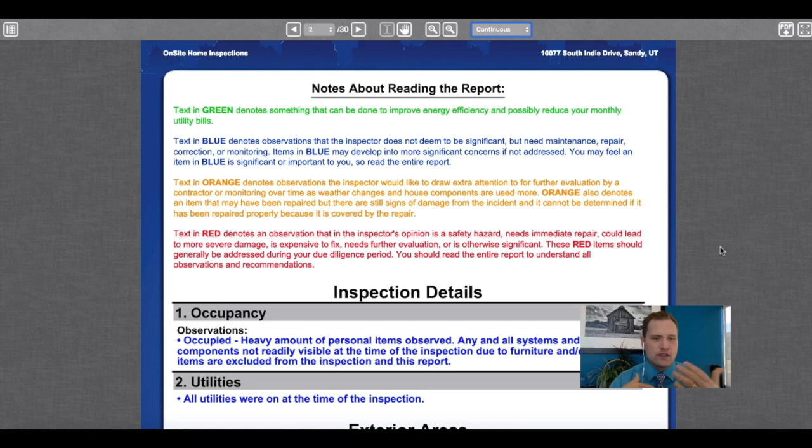Every report will have some sort of a cover page, and every inspection report will have their own method for reading a report. There's usually some sort of a key at the beginning. In this one, it uses color: green is something that can be done to improve energy efficiency, blue denotes something the inspector notes that's not as significant, orange is a little more serious, and red is something they think is a safety hazard requiring more immediate attention.

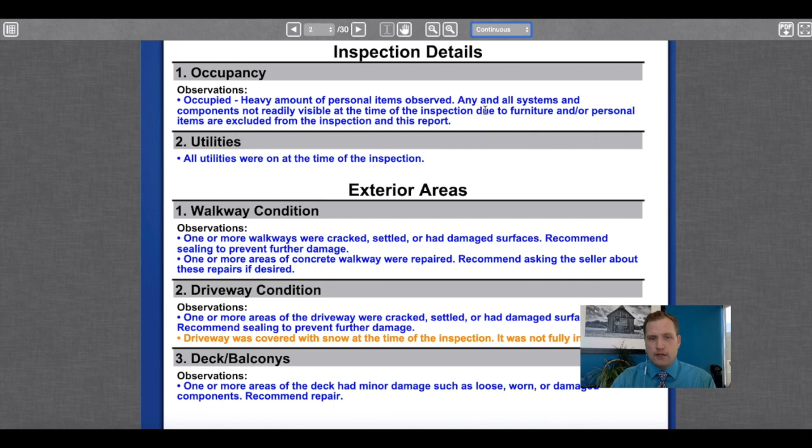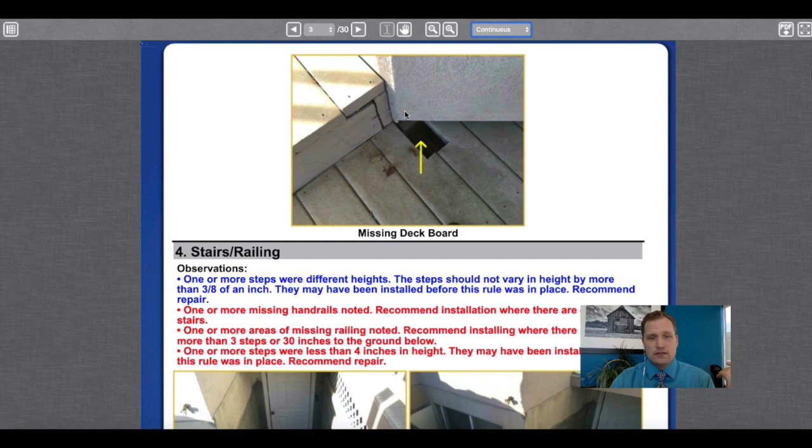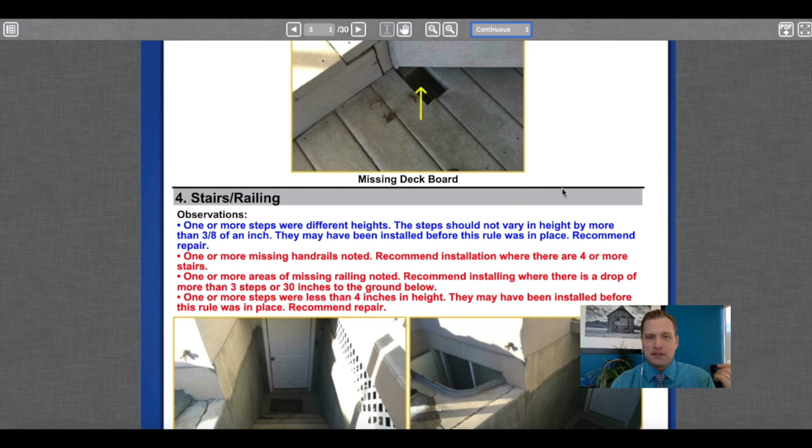You can see it's an occupied home, the utilities were on, and they observed the walkways, driveway condition, decks, and balconies. Here it's notated there's a missing deck board. They may have had something for their own personal use there that made sense for them, but may not make as much sense or be a good thing for the new buyer.

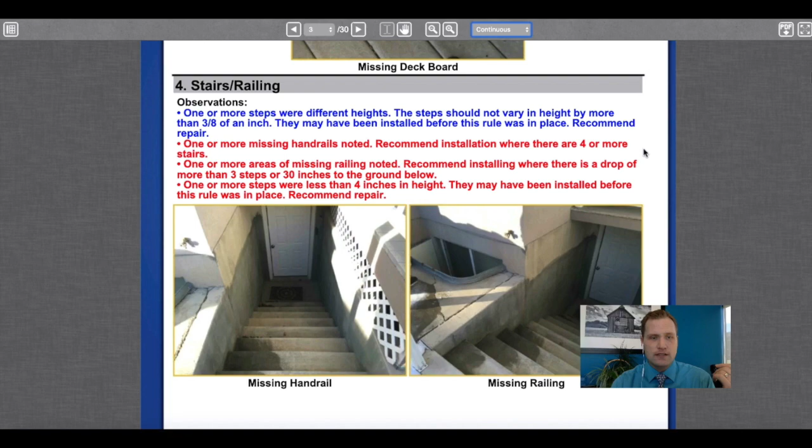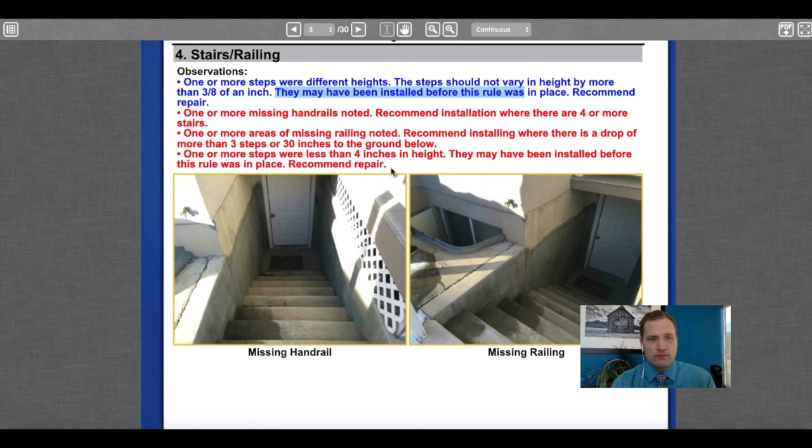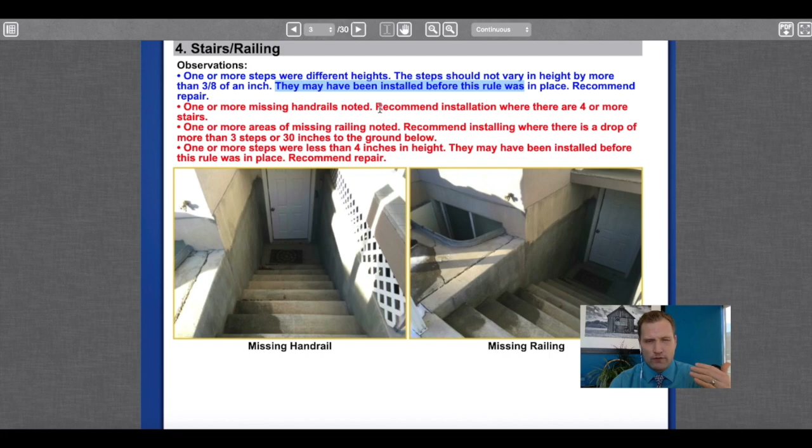Stairs and railings: there's a blue notation here that the steps are a little bit different height. They flag things, saying it may have been installed before this rule was in place. But look, stairs and railing has some red items too, like missing handrails. Though many people don't need handrails to get up and down the stairs, it's more of a safety hazard, and sometimes some loans may require that, which is why it's in red.

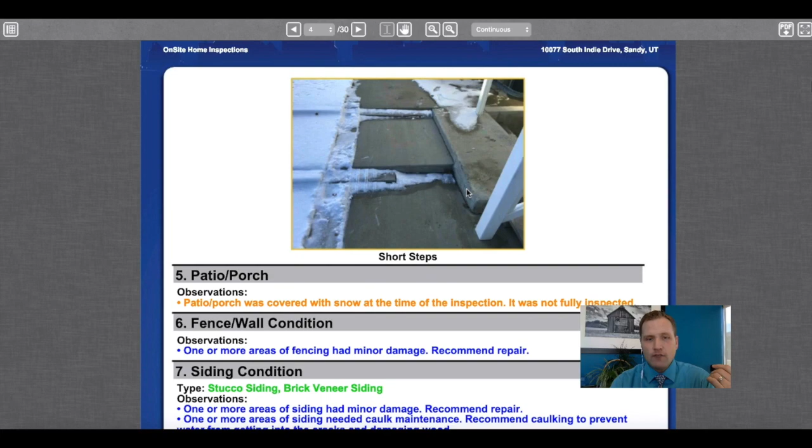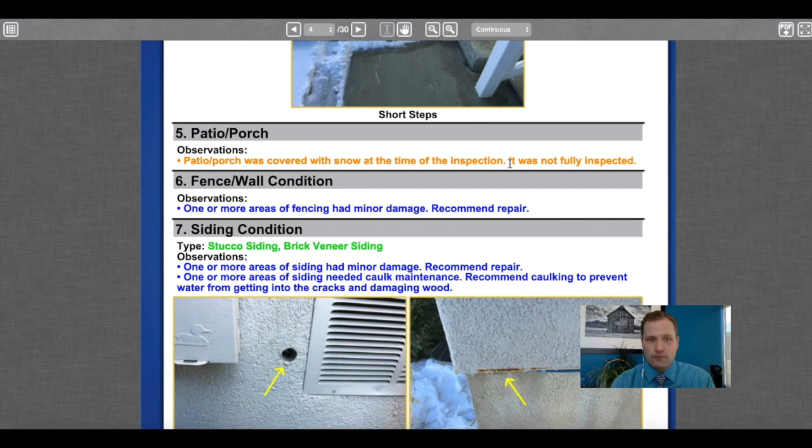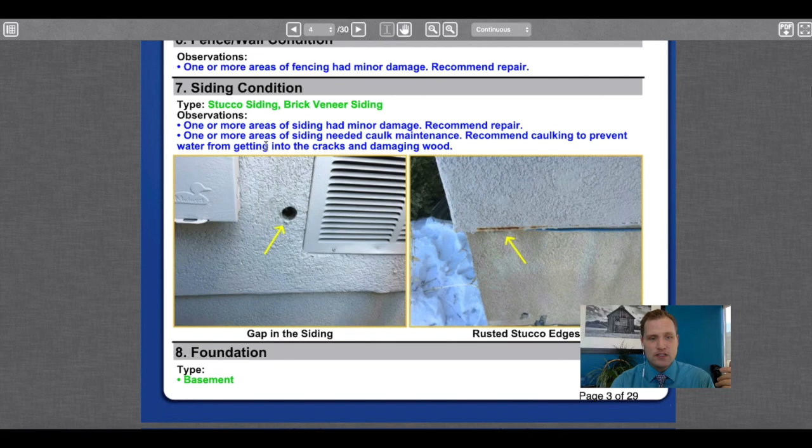Let's keep moving forward. We have short steps here, which isn't such a big deal but could be a potential trip hazard. The patio porch was covered with snow at the time of the inspection, so anything they can't inspect, they usually say why. We have some fence or wall condition issues, siding condition, so you can look and see each item that they feel is necessary.

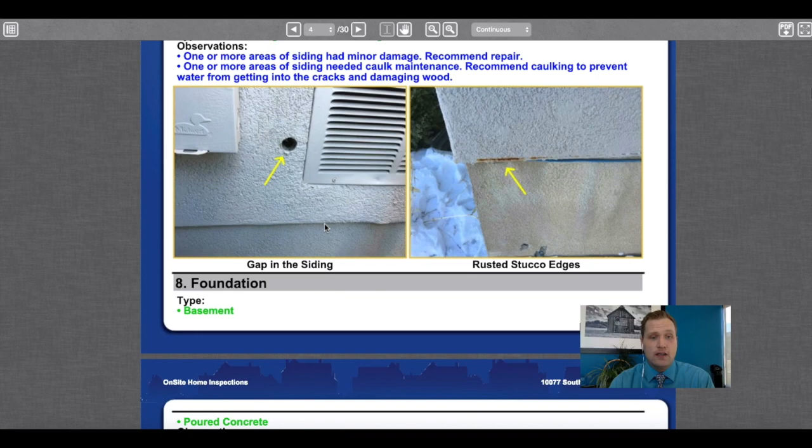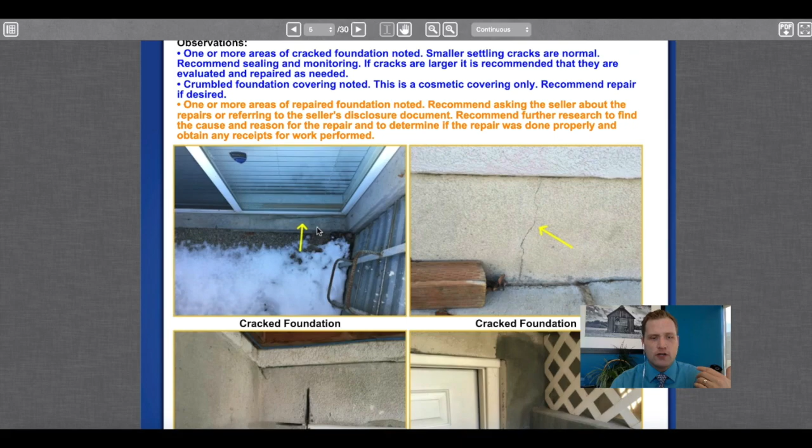They will add a picture so you can see what that means or what they're talking about. So you can see an example: here we have some pictures of the foundation, with some small cracks. The notated yellow arrows help you see exactly what they're talking about.

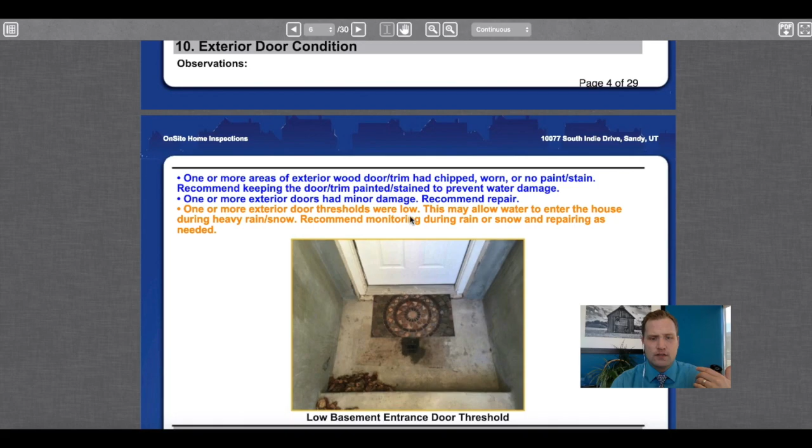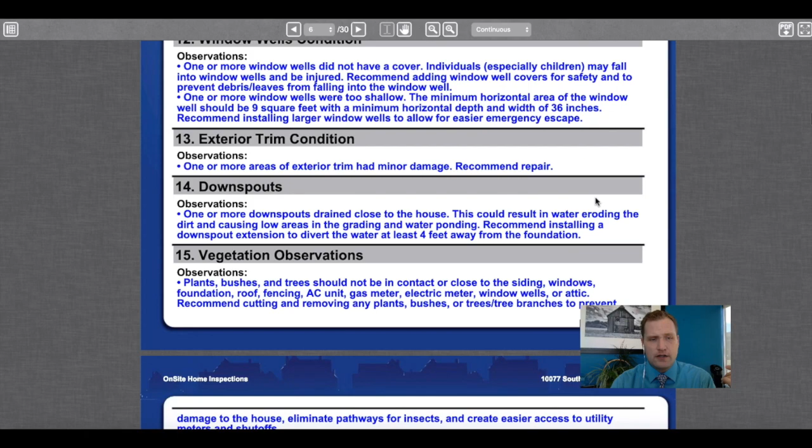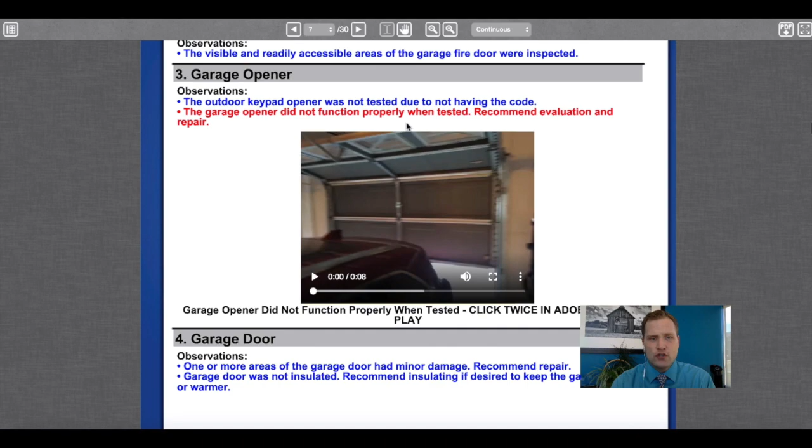Windows, window wells, exterior trim, downspouts, vegetation, and then we get into the garage. We have the firewall and the ceiling, fire door, garage opener, garage door, and they're notating damage on the garage door.

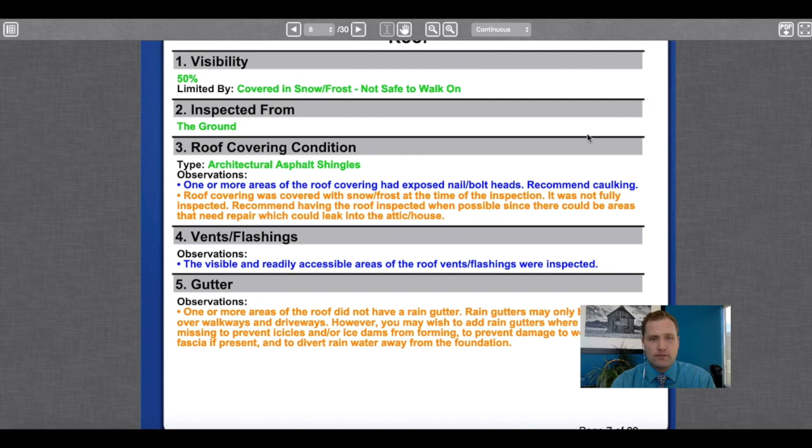No rain gutter notated here, right? They do take a look up in the attic.

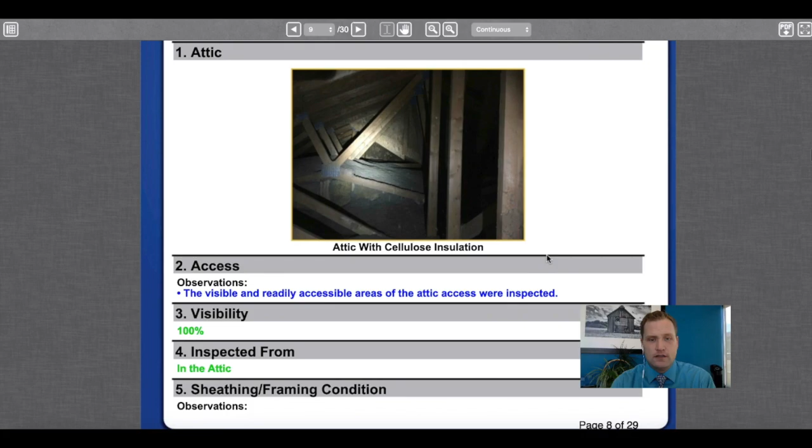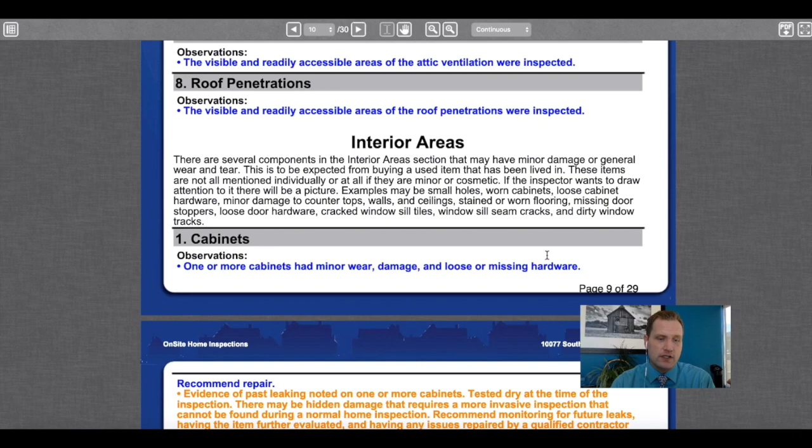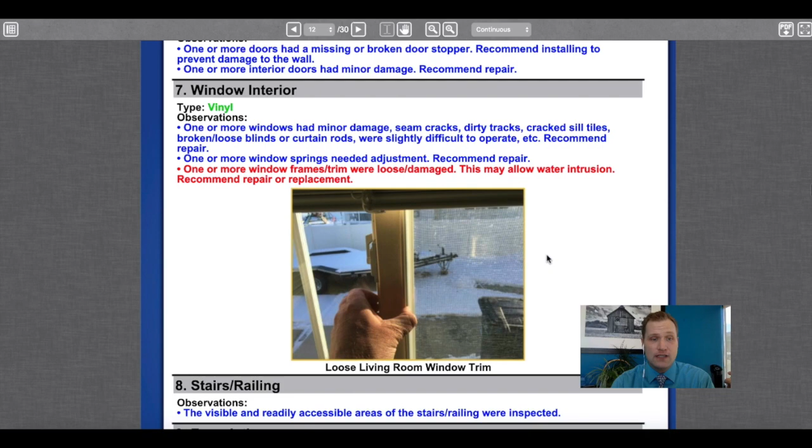Insulation condition, ventilation, roof penetrations, cabinets, countertops, wall condition, ceiling conditions, floor condition, doors, window interior. We have stairs, railing, foundation, structure, insulation, appliances.

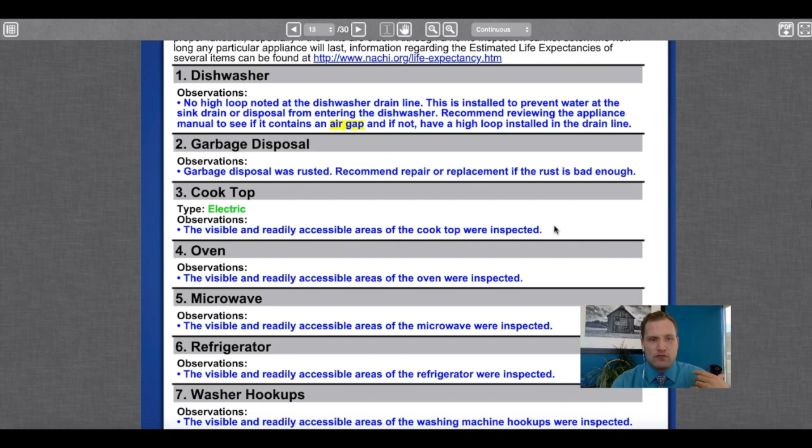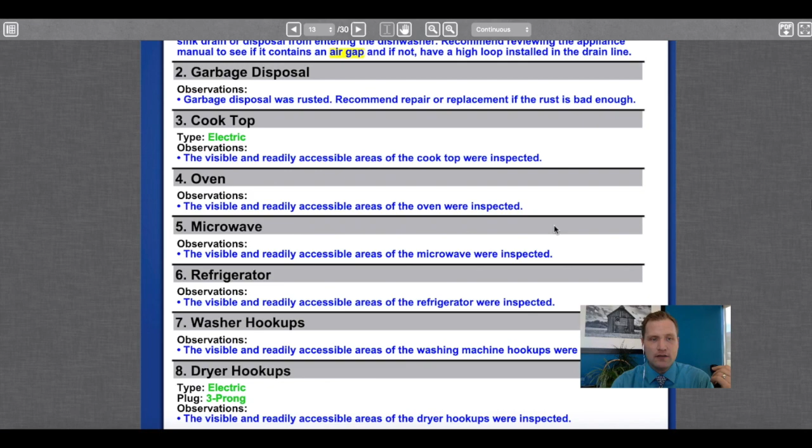There are sometimes where appliances do pass an inspection. They work as intended, and then sometimes people move in and they're not working so great. So that does happen once in a while, but at least you have someone there to check them, making sure for you.

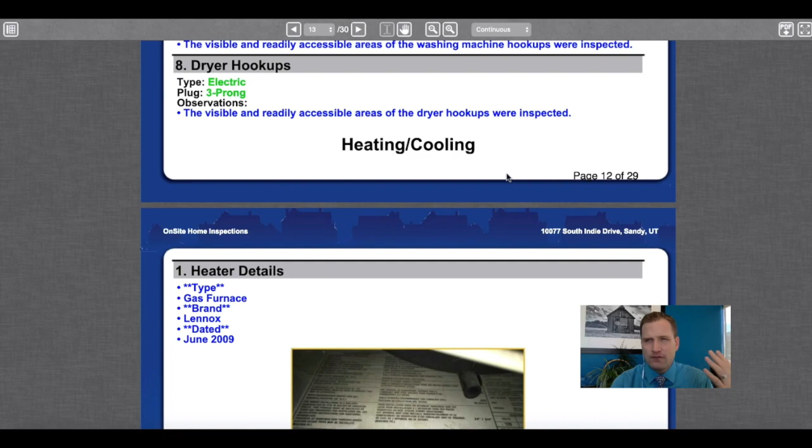Dryer hookups, it tells you what kind, right? So if you were not remembering if the home had electrical or gas hookups, you can go and look up in there.

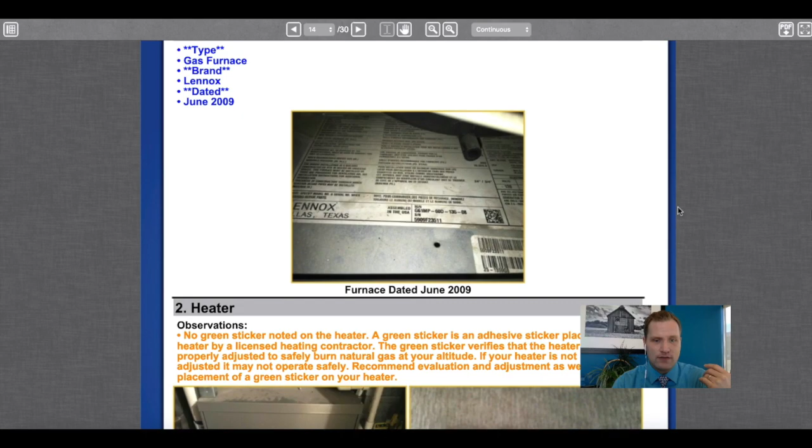Heater details, it'll give you the brand and what the date was if they can find it. This is a very popular one on the heater: no green sticker noted on the heater. Really.

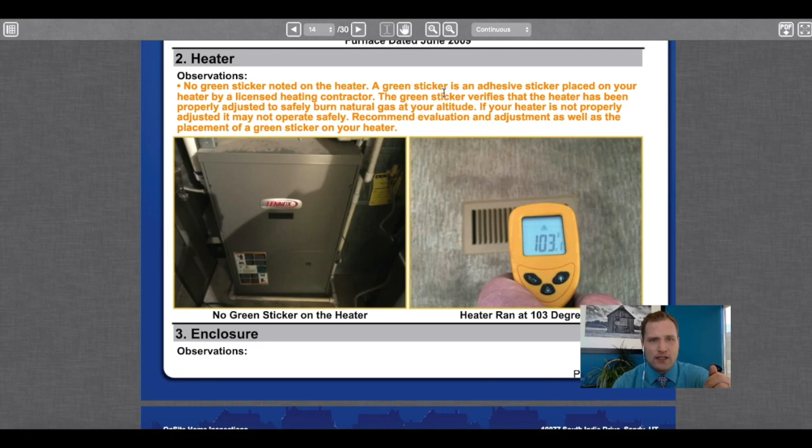If you are getting a home warranty on the home when you move in, then that would cover a tune-up as soon as you move in. If you want a green sticker, that's a little bit different. If there's a company that is still doing green stickering, then you could have them come out, and that's going to cost a little bit more.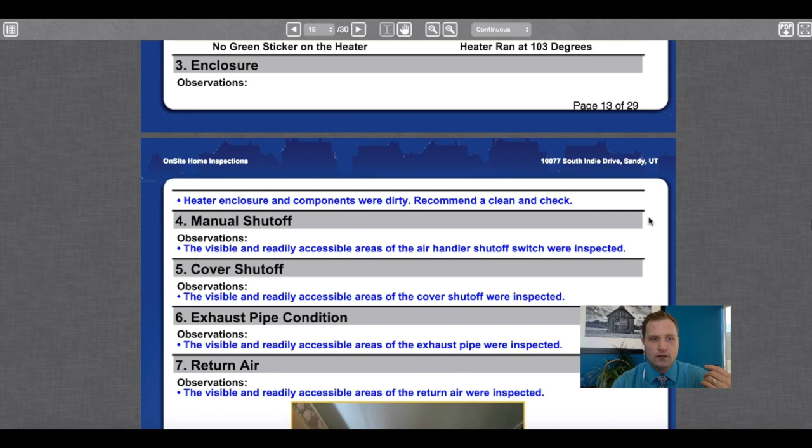All right. They test the temperature of the air going into the return air and the air coming out of the vents.

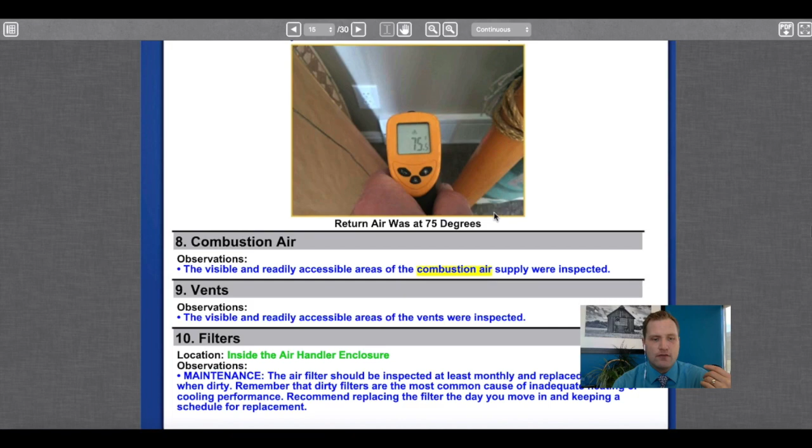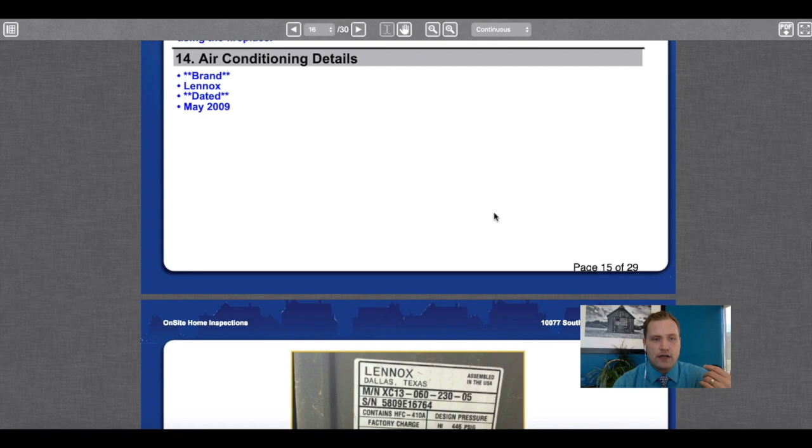Air filter, they have the air conditioning details, so the brand and the date. Outside temperature at the time of the inspection.

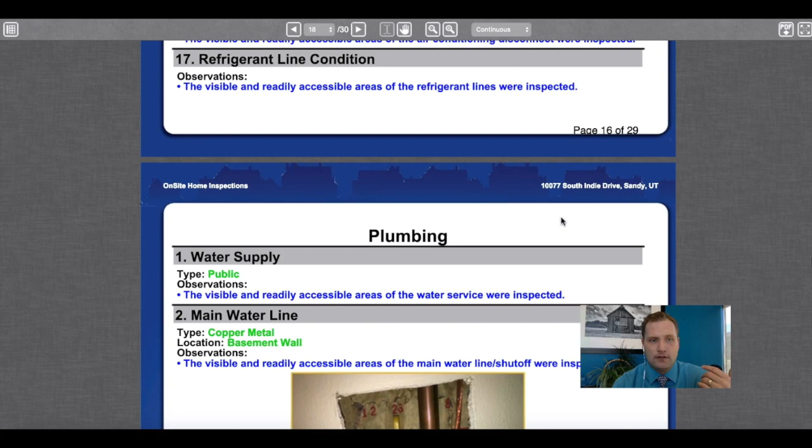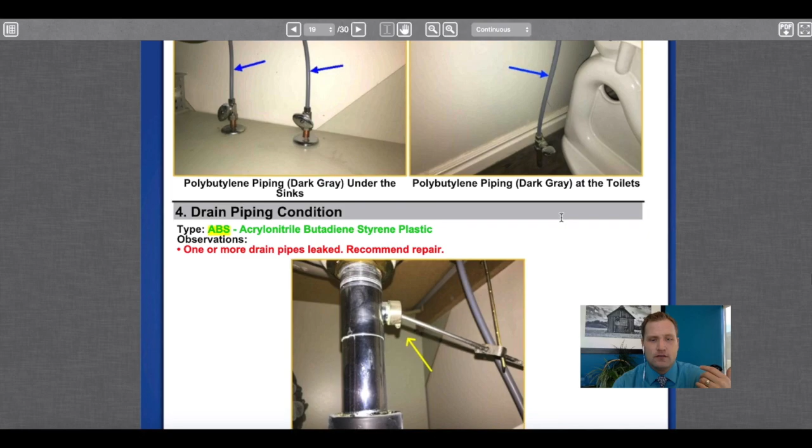Refrigerant line condition. Water supply, main water line, water supply line. The polybutylene piping here, they have notated here.

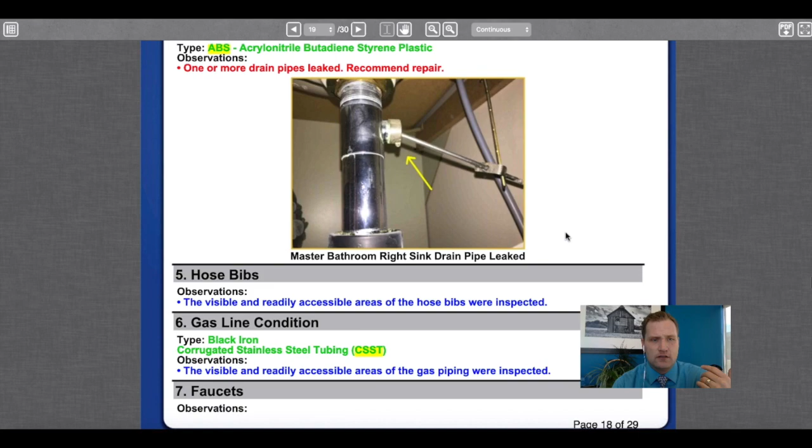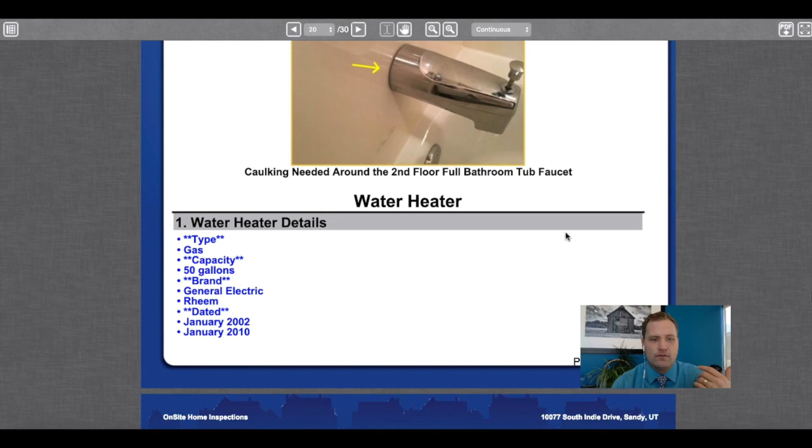Okay, gas line condition, faucets, sinks, toilets, showers, bathtubs. Water heater, gives you some of the details of the water heater, right?

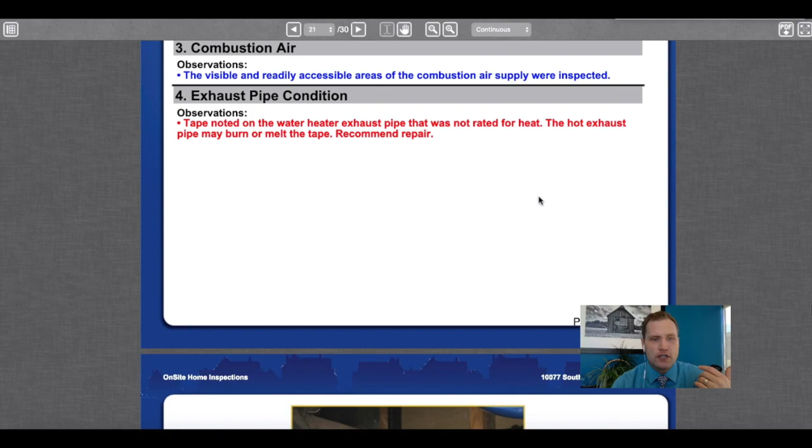Water heater, let's see, combustion air, exhaust pipe condition, expansion tank, cold water shutoff valve, water line condition, TPR valve, that's a pressure release valve for the water heater.

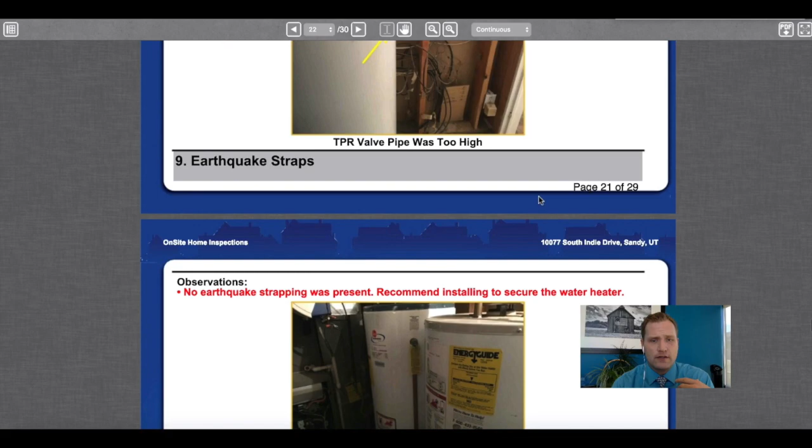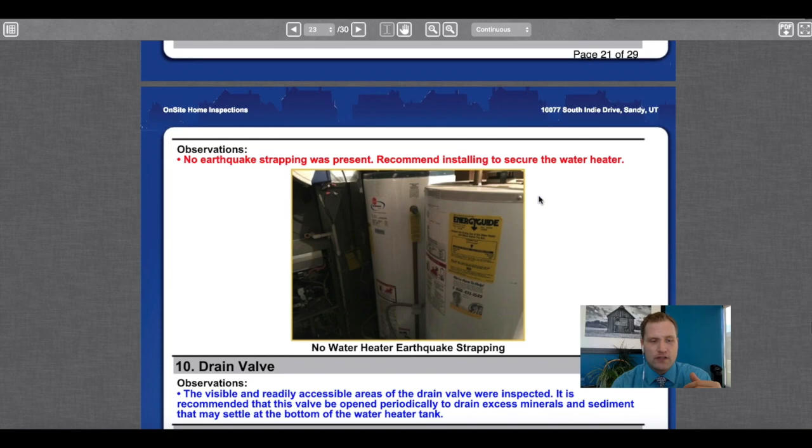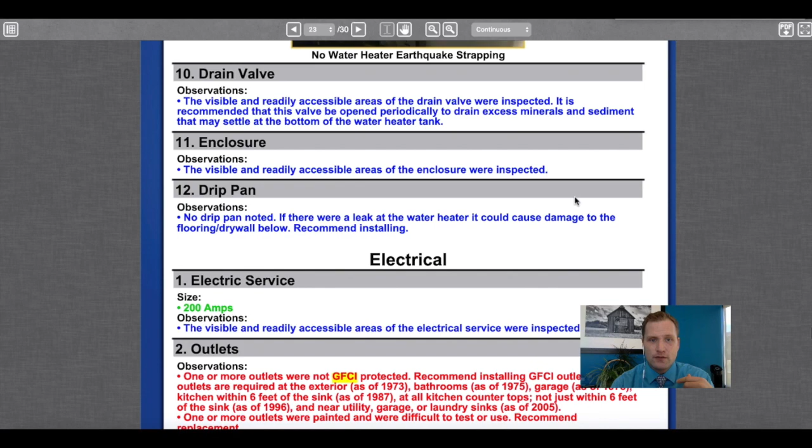Earthquake strapping, obviously here in Utah we do have a fault line that goes through our valley along the Wasatch Front, so that could be a good one to have added if you don't have that already. It's not too expensive to do it yourself afterwards, but in some cases we can ask the seller to do it and they will agree. So if that's important to you, let's do it.

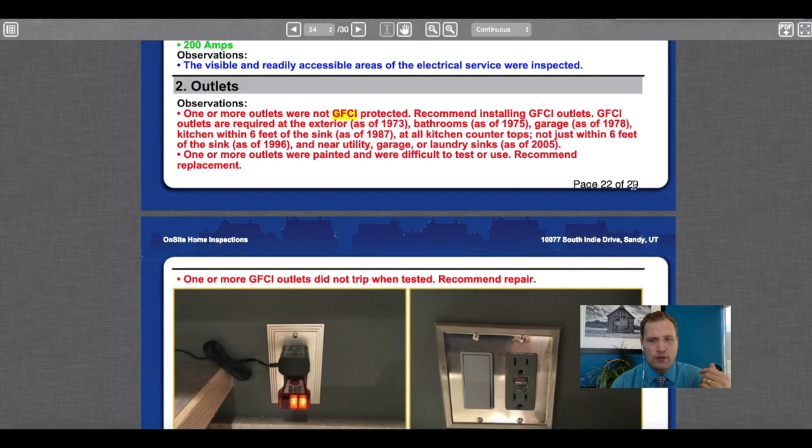Outlets, so sometimes they don't have these GFCI outlets in the homes where they should, where it's near water sources. And so it's noting here that it does not have those, or that one did not trip, so it's not doing its job.

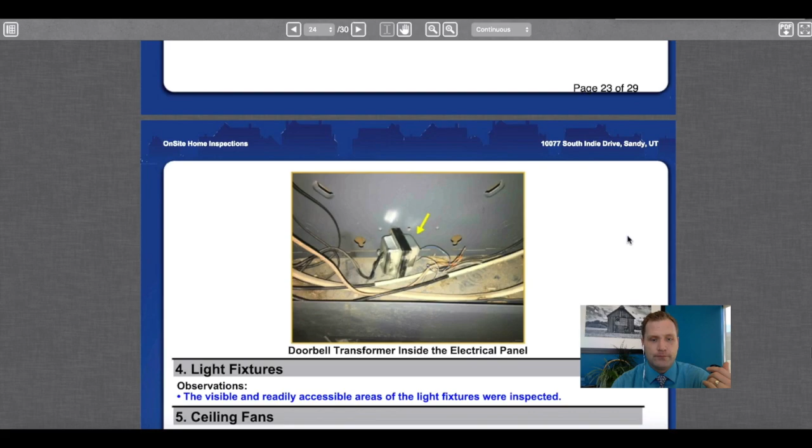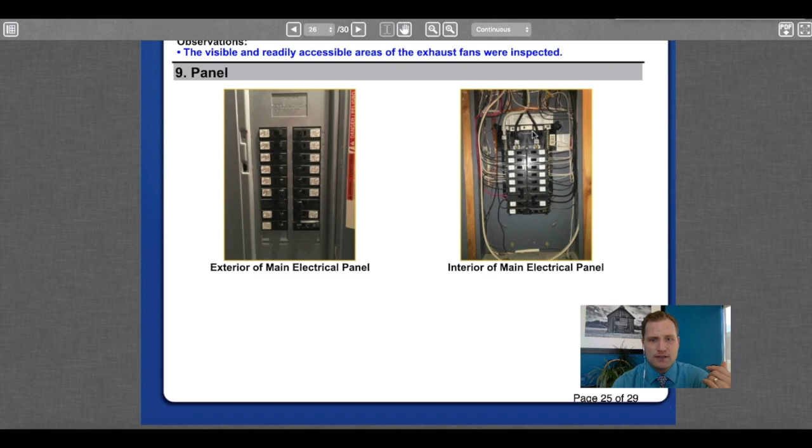Light fixtures, ceiling fans, branch wiring, safety detectors, exhaust fans, panel, so the electrical panel. You do take off the top of that so you can see underneath what it looks like. All right, panel wiring, breaker condition, fuse boxes.

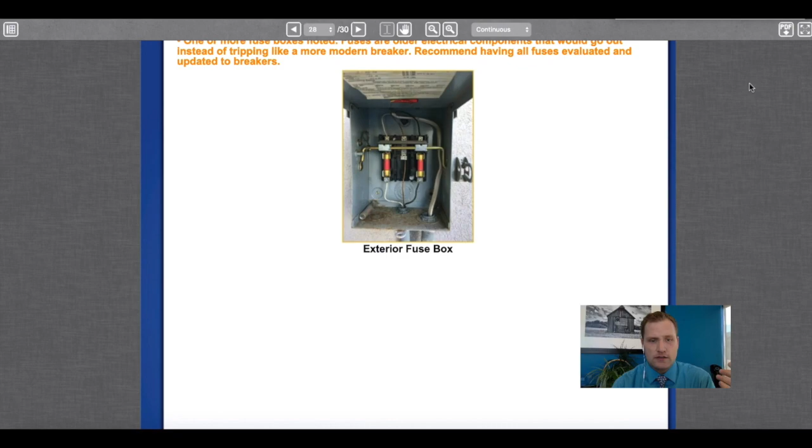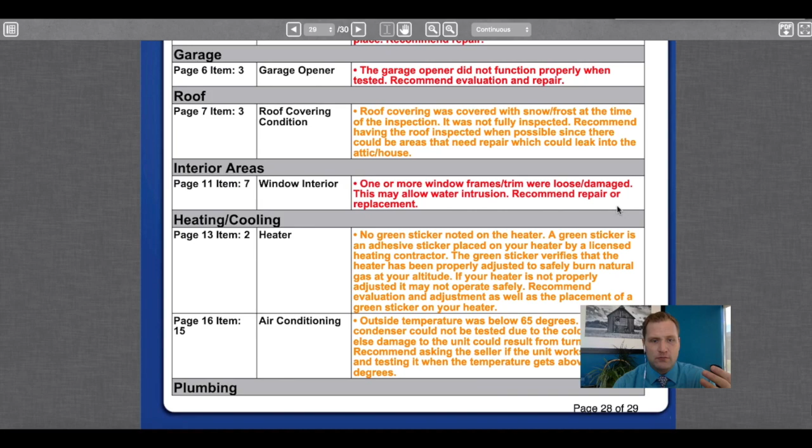And then at the end, there's a summary. So all of the items notated in red or orange are summarized here on the last page, at least on this report through this company. So you can see everything's kind of summarized at the end there.

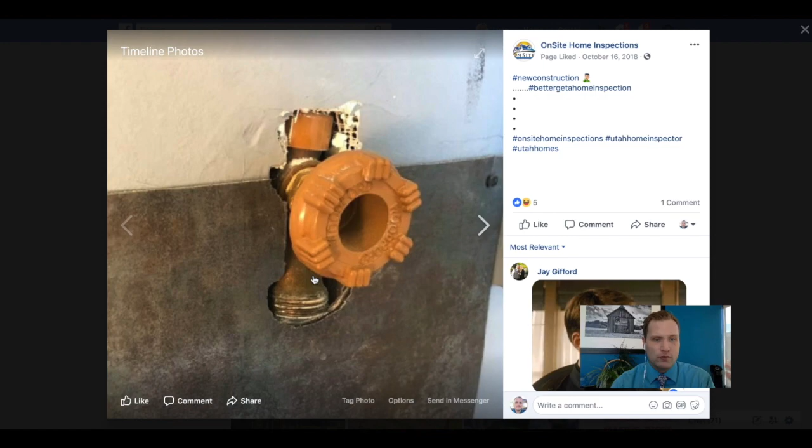I like following them on Facebook. They have some great things that they post every once in a while about things they come across out in the field when they're doing these inspections. As you can see here, it's a little interesting that someone would do this with their faucet, but let's check.